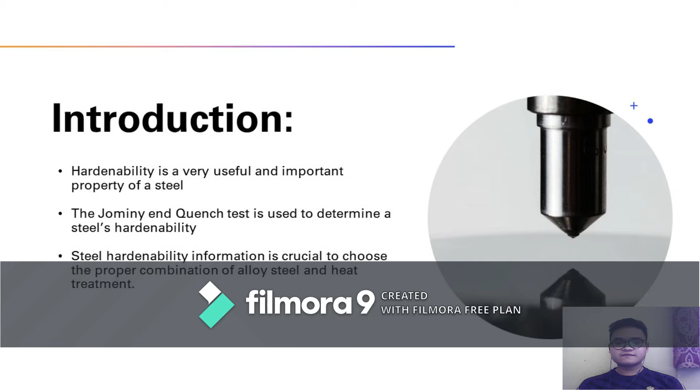Hello and good day everyone. My name is SATHESH son of GUNASEGARAN and my matric number is AA201052. And today I will explain about the procedure for hardenability test.

So first, we must prepare a cylindrical steel specimen with a measurement of 25.4 mm diameter and 100 mm length for the end quench process. Next, expose the steel specimen to a specific temperature for a certain period of time to produce austenite steel. Then remove it and mount one end of the steel to quench it with a water jet of specified flow rate.

Third, a file is used along the specimen after it cooled down to get a flat surface. The steel specimen is clamped at the Vickers hardness tester with an applied force of 50 kg. The screen of the Vickers hardness tester provides a microscopic image. Look through it and observe the two parallel lines on the steel specimen. The line is moved till both lines are stacking together, then press the reset button.

Place the specimen at the base of the hardness tester and then adjust its position close to the indenter until it makes contact. The start button is pressed and left until the indicator switches off automatically. Six, move the stage down and adjust it to the center. Look through it and move the stage up until the sign is visible.

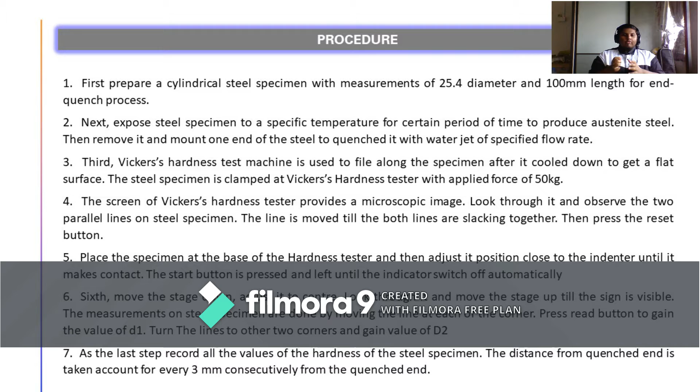The measurements on the steel specimen are done by moving the line at each of the corners. Press the read button to gain the value of D1. Turn the lines to the other two corners and gain the value of D2. As the last step, record all the values of the hardness of the steel specimen. The distance from the quench end is taken into account for every 3 mm consecutively from the quench end.

A very good afternoon. My name is Taranjit Singh, matric number AA2018, and today I'm going to proceed to explain the graph obtained from the Jominy End Quench test. Based on the graph of HRC against the distance from quench end of the mild steel specimen, it can be observed that the HRC value decreases when the distance from the quench end increases.

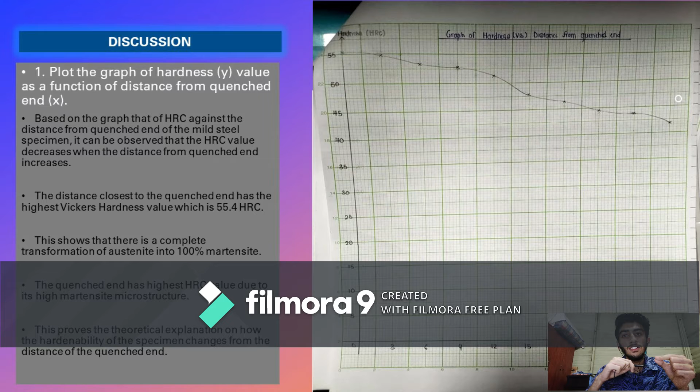The distance closest to the quench end has the highest hardness value, which is 55.4 HRC. This shows that there is a complete transformation of austenite into 100% martensite. The quench end has the highest HRC value due to its high martensite microstructure. This proves the theoretical explanation on how hardenability of the specimen changes with the distance from the quench end. To explain this further, we will go to the TTT diagram.

From the TTT diagram, when the hardness test is carried out at 0 mm, the hardness value is at the highest as the microstructure cools rapidly from austenite to 100% martensite. Martensite has the highest hardness compared to austenite and pearlite due to its BCT crystal structure, which is body-centered tetragonal.

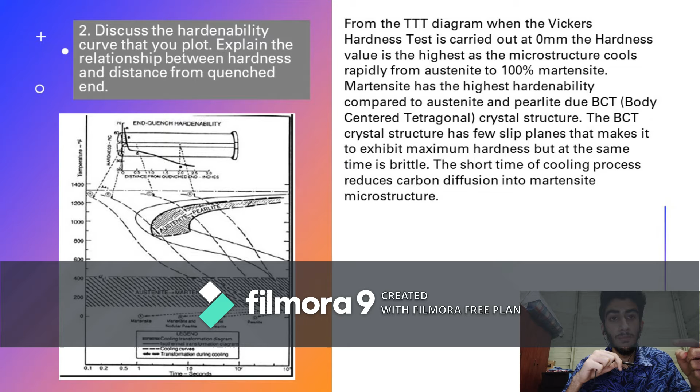The BCT crystal structure has few slip planes that make it exhibit maximum hardness, but at the same time it is brittle. The short time of the cooling process reduces the carbon diffusion into the martensite microstructure, hence increasing the hardness of the specimen.

Next, the HRC value continued to decrease further due to a mixture of martensite and increasing pearlite content, whereby pearlite microstructure is a ductile and tough microstructure. Hence, this will influence the mechanical properties of the steel specimen, having both hard and ductile properties. More cooling process time allows the carbon to diffuse into the specimen.

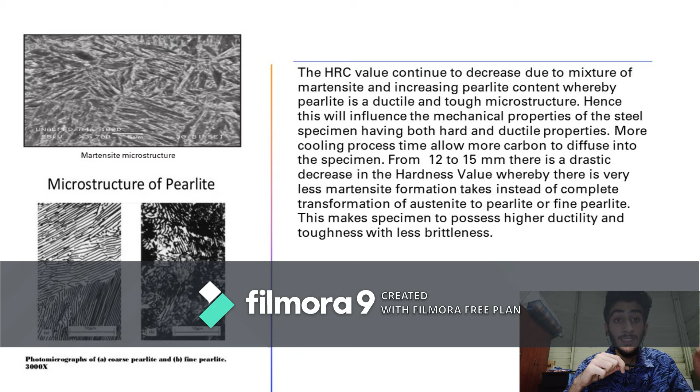From 12 to 15 mm, as we can see from the table, there is a drastic decrease in the hardness value. There is a very major difference in the hardness value. This is probably because during that formation, very little martensite formation takes place. Instead, there is more transformation from austenite into fine pearlite. This makes the specimen possess higher ductility and toughness with less brittleness.

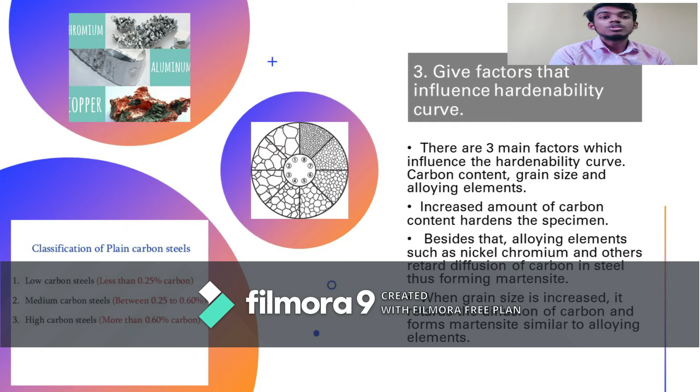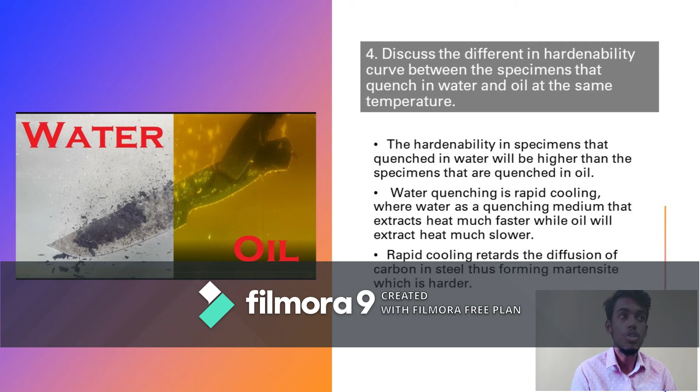Question number 4. Discuss the difference in hardenability curve between the specimens that quench in water and oil at the same temperature. The hardenability in specimens that quench in water will be higher than the specimens that are quenched in oil. Water quenching is rapid cooling, where water as a quenching medium extracts heat much faster, while oil will extract heat much slower. Rapid cooling retards the diffusion of carbon in steel, thus forming martensite, which is harder.

Question number 5. A cylinder bar with 25 mm diameter and 100 mm long is austenitized in a furnace followed by a quench in still water. If the entire specimen is immersed at the same time, predict the produced graph of hardness versus the distance from the end of the bar.

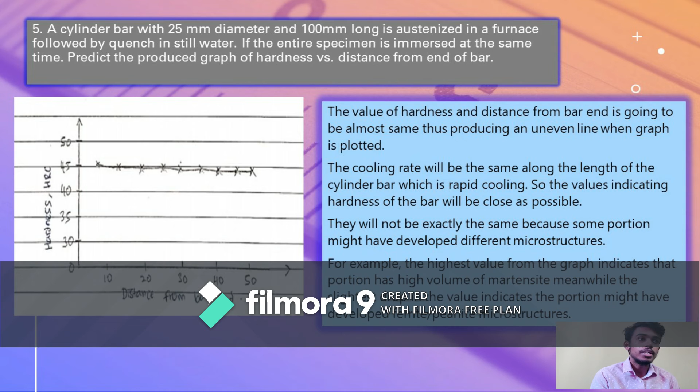The value of hardness and distance from bar end is going to be almost the same, thus producing an uneven line when the graph is plotted. The cooling rate will be the same along the length of the cylinder bar, which is rapid cooling. So the values indicating hardness of the bar will be as close as possible. They will not be exactly the same because some portion might have developed different microstructures. For example, the highest value from the graph indicates that portion has a high volume of martensite. Meanwhile, the slightest drop in the value indicates the portion might have developed ferrite or pearlite microstructures.

So for the last one, conclusion. The hardenability test using the Jominy end quench test helps to determine the hardness of the steel specimen at each surface after heat treatment on the material, such as annealing and normalizing. To select steel for a heat-treated component, it is important to know their hardenability. Alloying and microstructure both affect their hardenability, allowing the correct steel and quenching rate to be selected.

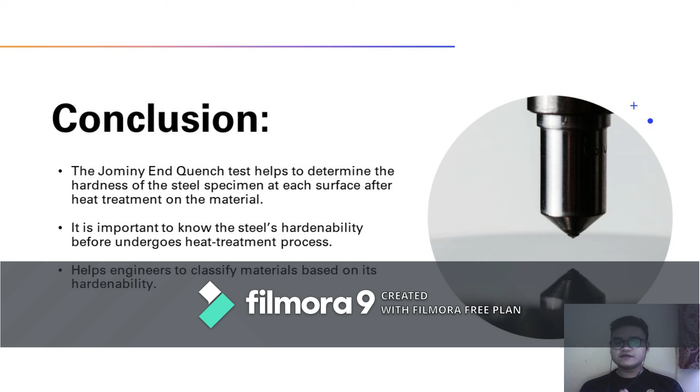The prior processing of the steel also affects the microstructure and should also be considered. These tests help engineers to classify material based on its hardenability so that it will be much more efficient to identify the specification of each material to be used in various fields.

Next, for the recommendation, there are a few precautions and recommendations to enhance the accuracy of this experiment. For example, during heat treatment, wear goggles and heat insulator gloves to prevent sparks from the furnace hitting hands that lead to injuries. During the quenching process, allocate a specific amount of time on the steel specimen that corresponds to the heat treatment temperature. Quenching beyond or before the specified period of time can alter the steel microstructure. Use proper tongs according to the type of work.

The indenter of the Vickers machine should be examined first to ensure there is no damage. A diamond pyramid shaped indenter is recommended because diamond has high hardness and wear resistance, which makes it a good abrasive. Hence, the indenter does not deform easily without fracture or damage.